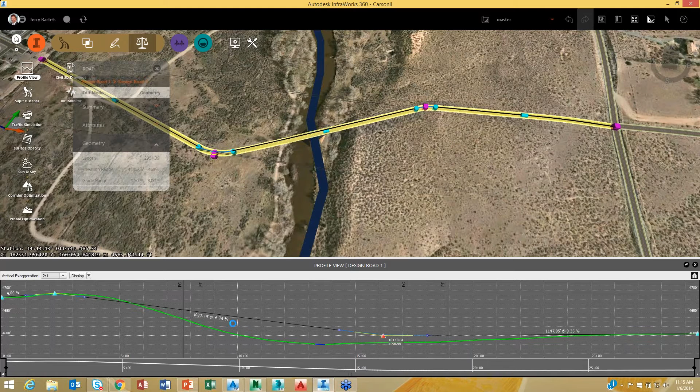And really, I think that's pretty good. I don't need to change too much more. I've got enough that I can work with for a bridge. I'm going to select my roadway, and what we'll do is we'll extend the bridge over a little bit further so that it's not quite as tight to the water. Move this back in this direction.

And maybe we'll enhance our bridge just a touch. Instead of using the default piers, I'm going to select those and go with, I like the arched myself. So I'm going to double pick to set that to the arch display, and then I can right click on that one and I can easily apply that to all the piers. So we'll get that in.

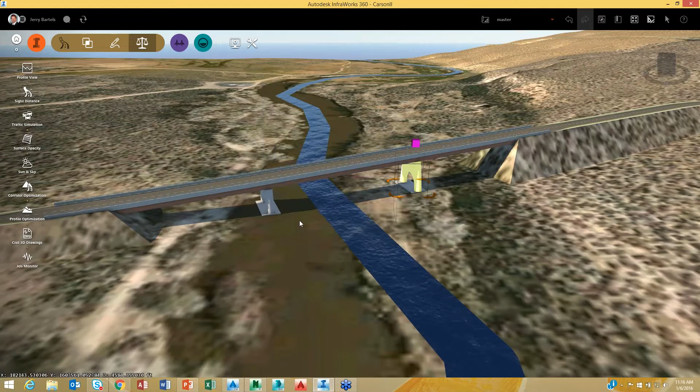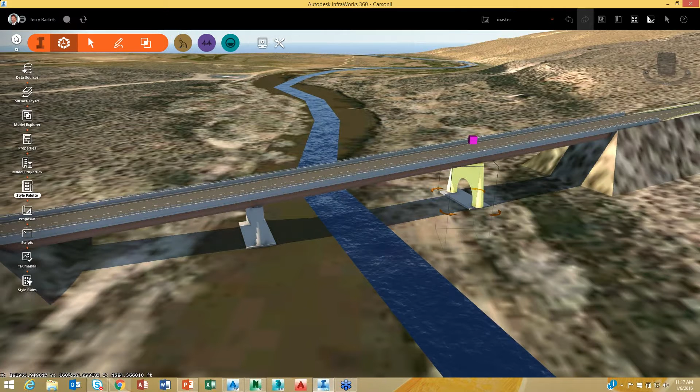And we'll do one other thing. Our bridge is nice in that if we zoom up, I've got a guardrail. I'd like to get a little bit more detail on it so that I get a little more bonus information as I attempt to use this in Civil 3D or 3ds Max. So what I'm going to do is we'll apply a more detailed style to it. We'll bring up the styles palette. We'll come down to roads, grab the bridge deck, and we'll do this one here with the median.

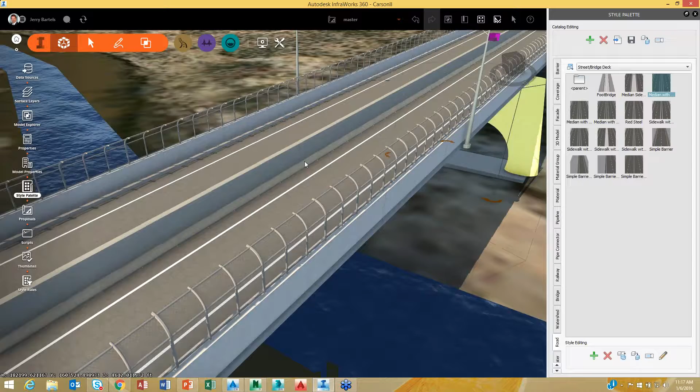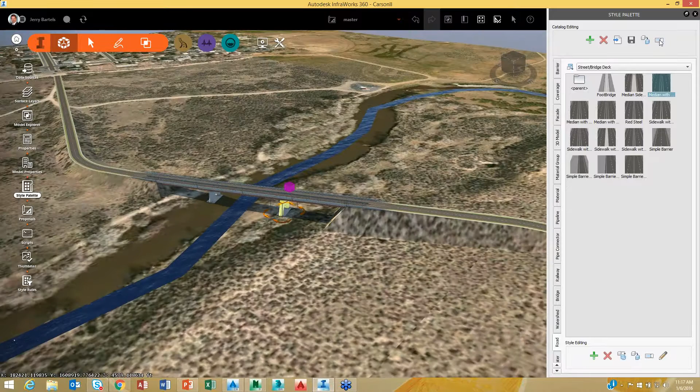Bring that onto our bridge, and what we should get is light standards. We should get the New Jersey barrier running down the middle. We've also got the fences on the outside. We get a fairly detailed bridge very quickly by creating this in InfraWorks 360. Okay, so with that created, I'm going to drop out of my styles palette here. We'll maintain this as our model for right now.

The one thing that I need to do if I had pulled this up from Model Builder is assign a coordinate system to it, because by default it's just going to be in lats and longs. So we'll hop into my model properties. You'll see that in this model I've already got a projection associated with it that's Nevada West. It's NAD 27, but it's west and feet. Because Carson City and Lake Tahoe are pretty much on the border of California and Nevada, that puts us in that zone, and that's the coordinate system that we're working with.

So with that, I'm pretty happy with my model. For me to be able to use it in Civil 3D or pull it directly, I'm going to have to close out of the model. So I'm going to close, and we'll fire up Civil 3D. I'm going to begin by going up to Insert. We'll grab InfraWorks 360, the InfraWorks 360 model, and we will select Carson 2, which is the one that we're in right now.

We'll open that. I do not have a coordinate system currently assigned within Civil 3D, so we'll set that to be consistent with what's in InfraWorks. I can establish an area that I'm interested in, so we'll select area and use my online map information to do that. I can see a dark line as the limits of my model. I'm going to use an area that's just a little bit within those limits. We'll take something like that.

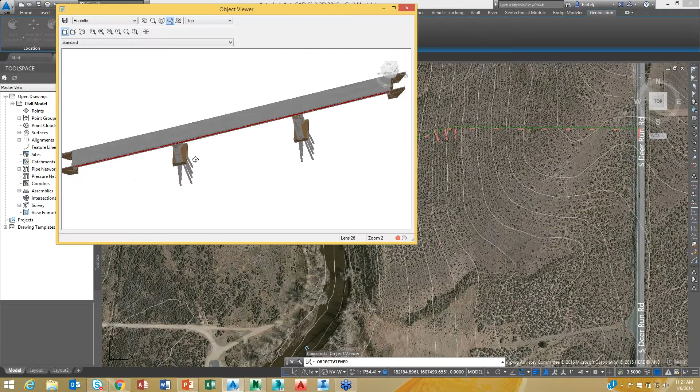This is a fantastic way that I can bring in the Civil 3D information. I've got my centerline roadway, I've got my bridge. If I look at the object viewer for the bridge, I get a fairly detailed bridge. My piers look pretty similar to what I had in the model that I created, but I've lost a lot of the extra detail that was created with respect to the fence, the New Jersey barrier, and the light standards. I'd like to at some point get access to that, so we'll start to look at how we can get to those things.

Now let's come back into InfraWorks. There's one other thing we're going to add to our model: I'd like to add a couple of buildings. So I've got the road, I've got my bridge. We'll come back to that model now and add a couple of buildings that we can work with.

So we'll go ahead and have this initialize. When this pops up, we'll probably see that our other model has come back from Model Builder at this point. Nope, not yet. Oh yeah, no, it did—it was this one right here. So we'll continue on with what we had.

And what I'm going to do is this: in this location, I'd like to add a couple of buildings. We'll enhance our model a bit.

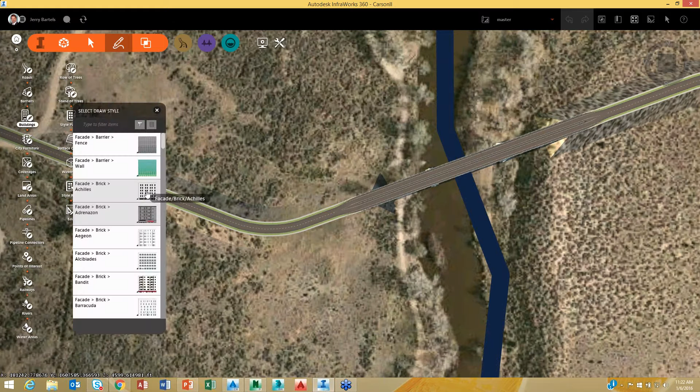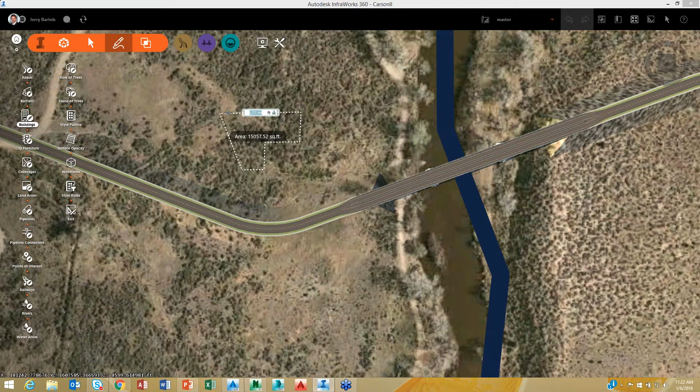I'm going to draw and create a building. I'll just grab the one facade here, and the one dimension I'd have you take note of is I'm going to type in 50 foot and enter so that it locks at a 50-foot dimension. I'll pick my point, then hold down the control key and continue to pick points from there. The reason I'm doing that first one at 50 feet is so we can go back later and verify that the size of what's exported is correct.

I'm going to go ahead and create another building on the other side over here. So we'll select that guy and drop that one.

With my buildings created, as I look at these, my level of detail for the buildings has been turned up such that you can see I've got the fire escapes on the outside, I've got some awnings outside the building. If I come over to this one, we'll see that my windows are inset, as is the doorway, and there's a lot more detail on the buildings.

Where I set that was within the tools in here. We'll come back to my application options and go into my model generation. I'm going to show you where this is, because by default it's usually set down to low or medium for performance's sake. I'll set this to high, so that I could get the detailed buildings out of this environment, much like the bridge.

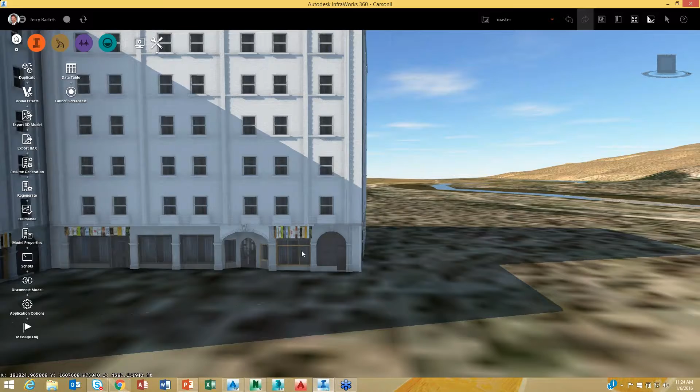If you set that after the fact, you'll want to hit F5 to get it to redisplay your model, and then once your model is redisplayed, you'll have access to that higher level of detail with the buildings.

At this point, I'm satisfied with my model. I'm going to come back to Civil 3D. If I'd like to see where those buildings exist in this environment, there wasn't the ability to export those buildings directly in that tool, or import it through the tool we looked at before.

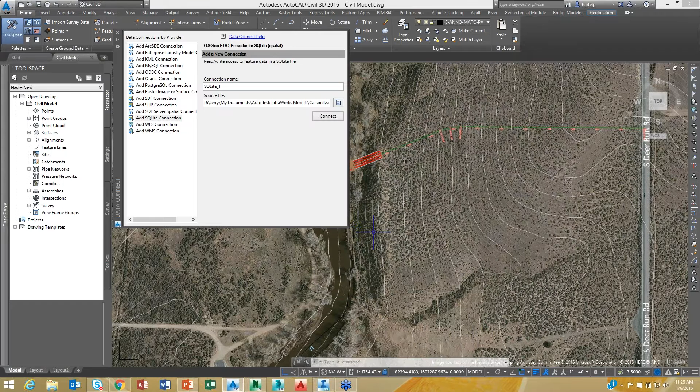So instead, what I can do is use Map to bring up the task pane. We'll go ahead and turn that on. What I'm going to do is connect to data, and I'm going to connect to the SQLite database, which is the file format we're using for the InfraWorks model. I'll navigate out to Carson 2, and we'll connect. Then I'm going to scroll down and tell it that I'd like to see the buildings.

Go ahead and add that to Map. Now when I do that, on occasion I'll see that my buildings are now in a white space, and from a coordinate standpoint, they're very different from where they should be. I've actually got coordinates down here in the negative values.

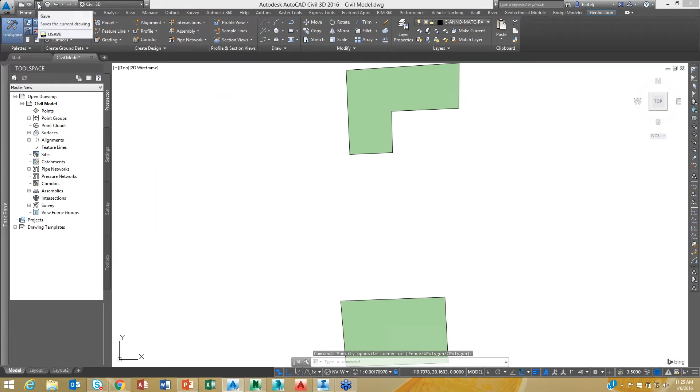What I'm going to do is this: if I save the drawing, I'm going to close it, close my civil model, and then open that back up again. The reason is that it had a coordinate system in it initially that was set by Civil 3D. Because I'm using the tools in Map, sometimes until I save, I might not have access to both those coordinate systems being the same.

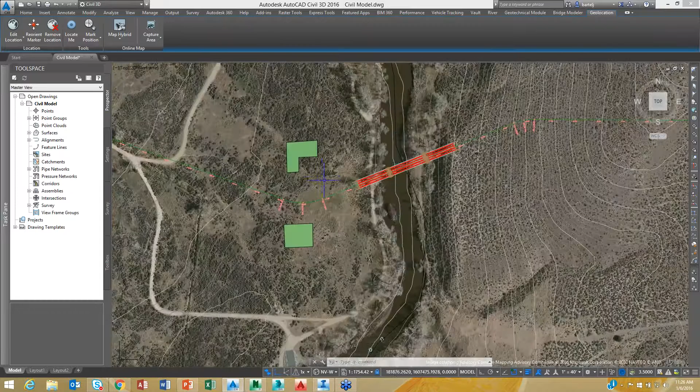So I'm going to zoom extents, and we'll see now that those buildings have been reprojected exactly into my model where they should be. All right, so just using the interaction with Map, I can start to pull data in just to see where it is.

All right, maintain that connection back to InfraWorks 360. Those buildings look good, but maybe along the way, I'd like to get some of that detail that's in InfraWorks 360. I created those beautiful three-dimensional buildings. Maybe I'd like to bring those into Civil 3D and use that as part of my model, maybe leverage that even further downstream or at some place outside of the InfraWorks environment. Well, I can do that very easily.

I'm going to come back to InfraWorks. We'll view my model here from the top. One of the things we'll look at here real quick is if I hover my mouse once again, like we looked at with the road to determine the station, if I hover over the point of the building down here, I can see roughly the coordinate of where that corner of the building is.

So that's roughly 18, 18, 29. All right, so we'll just keep that in the back of our mind. 18, 18, 29 is the location of that corner.

Let's do this. I'm going to export. If I want to bring this out, we'll export a 3D model. Using the options that are available to us with a polygon, I'm going to pick, we'll just window around the buildings in this location, double pick to finish.

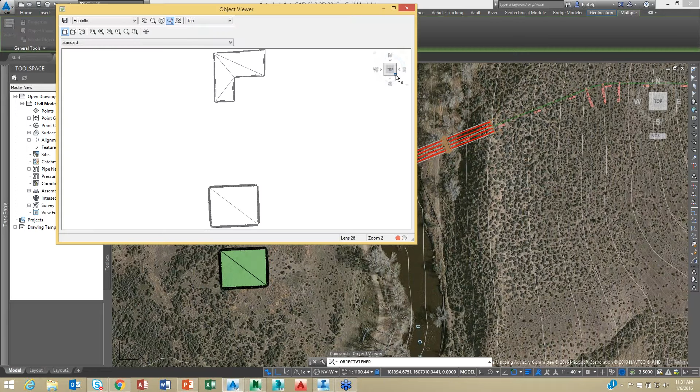At this point, what I have is the buildings have come in. I'll make a quick lasso around those, and with those selected, we'll go ahead and look at my object viewer. I can see that I do have my geometry, I have the inset windows in that, but I didn't get the materials. That may be fine, that may be all that I need.

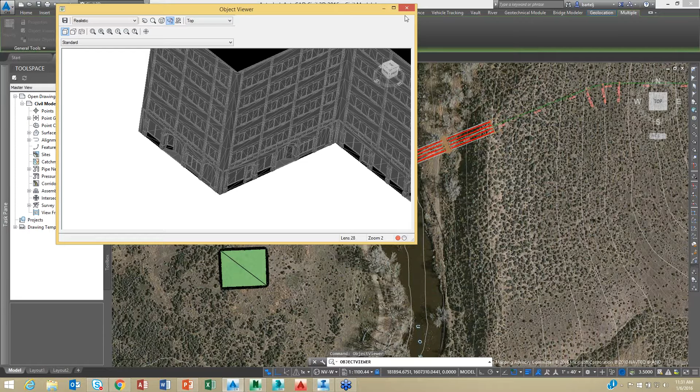If I just need the model geometry in here, that gives me a mechanism to do that. If I want to bring the buildings in and also get the materials associated with that, I have opportunities to do that too. So I'm going to close the object viewer, back up in time - this is what that undo mark was for. We come down, say undo, and then B for back, and it's going to roll back to the point before I brought those in, because we'll be bringing those in again.

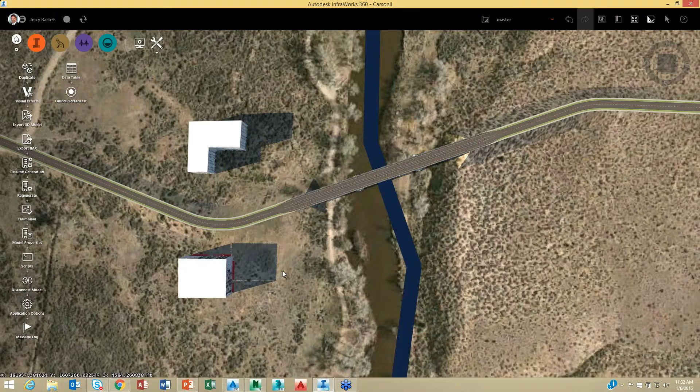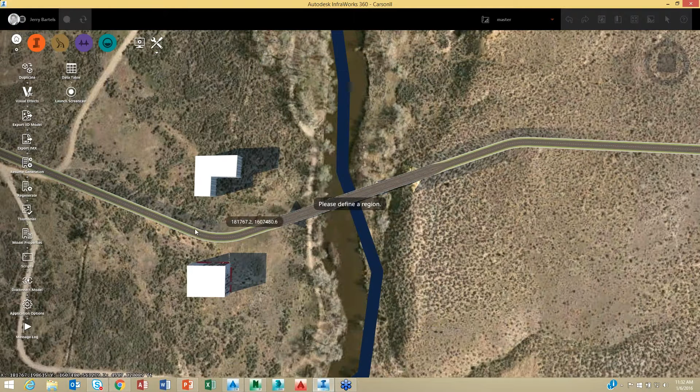We'd like to get the buildings now with the materials. If I'm going to do this, I'm also going to bring the bridge as well - I only took the buildings before, but since we're doing this a second time, bringing in that level of detail with the materials, we'll do it for the bridge too. So we're going to export the 3D model as polygon, just to keep it somewhat size-wise nimble that we can work with.

We'll pick those points - the area that we're going to work with. Once again, we're going to set it to user defined, and set these to 0. This time, because I'm exporting a number of things, we'll just do it in a single file, and put that out in my folder here, and call this site model, and we'll go ahead and export it.

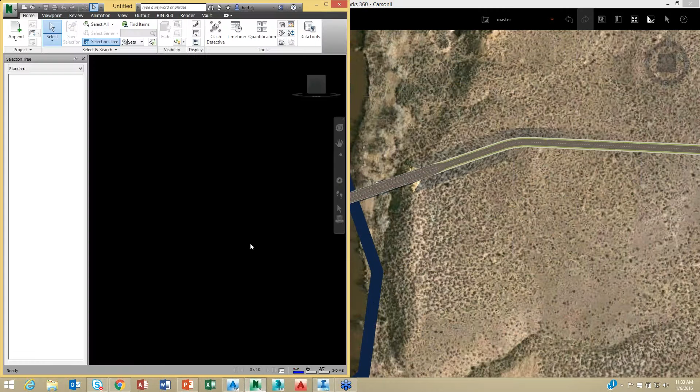Now, when it takes it out this time, we'll process it through Navisworks. Navisworks within the suite gives us our best ability to manipulate FBX files and still maintain our materials and all of the look and feel of the geometry that existed in the original authoring application. So I'm in Navisworks, all I need to do is append. We'll go up to my folder here on the desktop and grab my site model.

It's brought in, and as I view that from the side, we see here is our model. I have the 3D geometry, I've got all the materials. If I start to orbit around this, I can see that I've got my fence and all of that. That rich three-dimensional geometry that we created in the InfraWorks 360 environment, I've now been able to pull out into an environment here.

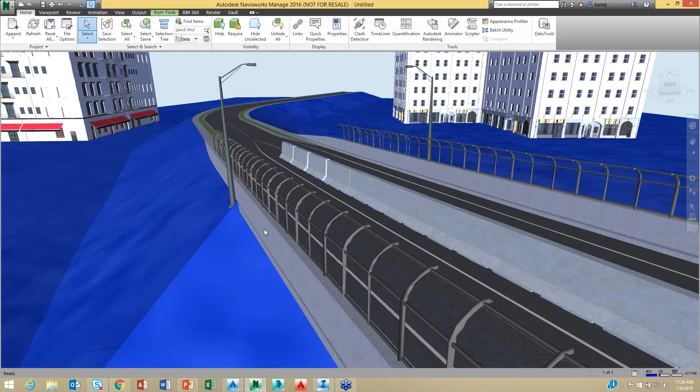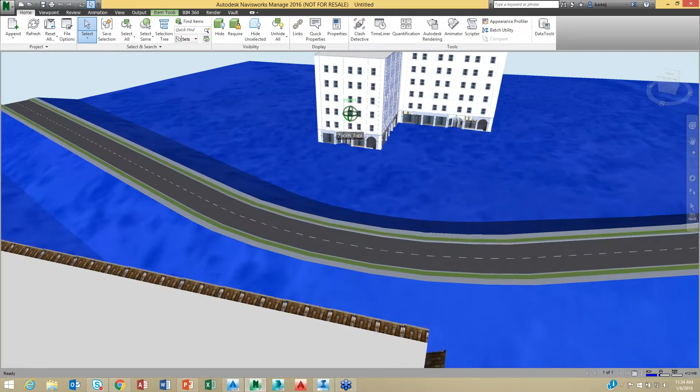We're going to use the step of going through Navisworks to basically bake in the materials such that we can bring it into Civil 3D and move it from there. But before we do that, a couple things - when we deal with Navisworks, we need to make sure the geometry comes in correctly, because this is a tool we use to bring together or consolidate a lot of different models from a lot of different authoring applications. I need to make sure it's the right size.

So I'm going to go ahead and do review, and I'm going to measure. If we come down to this point here at the base of the building, we'll pick that point and pull it off to the side, and we can see my distance is roughly 1.6 feet - that's definitely not the size of my model. It should have been around 50 foot, but that's all right. What that means is when the geometry came in, it was not scaled properly.

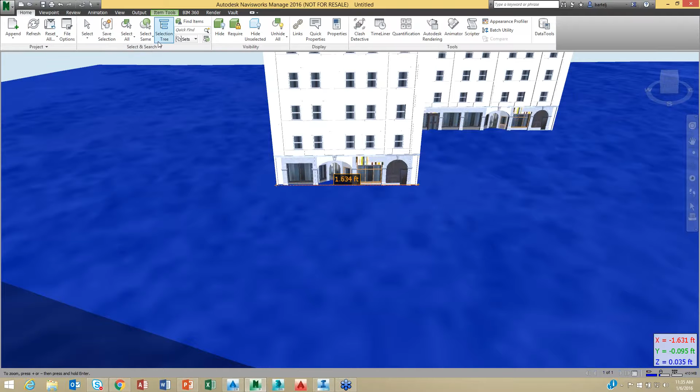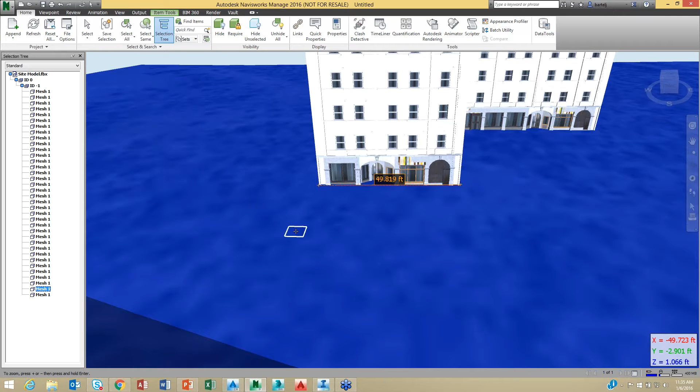So we'll go to the selection tree, which shows us our model, and a quick right click on the model itself - I can come down to units and transform. Instead of my units coming in as centimeters, I'm going to bring my units in as feet. When we say OK, we see my geometry automatically updates so that it's more consistent with the 50 foot that we would have expected.

Now, the other thing is, if there are questions about the coordinates that it currently resides at, that was like 18, 18, 29 or something like that. Can we see the coordinates here in Navisworks? And I can. If I come up to View and Windows, there is a measure tool that will show me those coordinates, that as I pick points to measure, it will show me where

I'm at. So the corner we were looking at down here was this guy. So if I pick, I didn't hit right on the corner, but I'm 18, 18, 30. I think we were 18, 18, 29 before. So I know now that my model is scaled properly and it's sitting at the correct coordinates that we would expect going into Civil 3D.

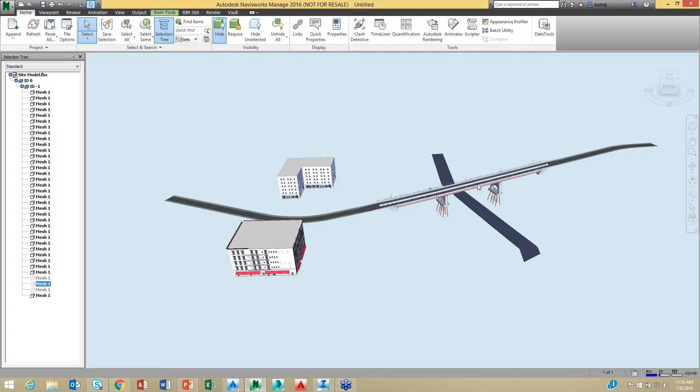The only other thing that I'm going to do is I really don't want any of the surface information. So I'm going to go ahead and select that, and I'm going to start to hide it. I've already got the surface in my file. Granted, there's some proposed in here. I would do that with my corridor model anyway, so I'm going to go ahead and pull those out. What I'm interested in specifically is the bridge and the buildings. So we'll isolate those on the screen using hide, and then we'll come down and we'll export via FBX.

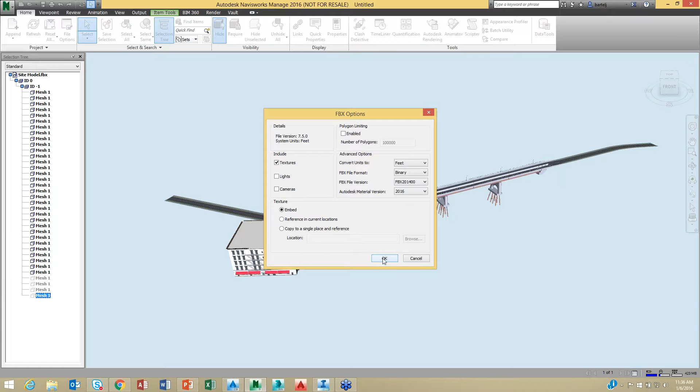Include textures, lights and cameras. I didn't create any anyway. We'll embed the textures, that's good. We'll say OK, and this is going to go in as my, we'll say project building bridge. I'll save that FBX file. We'll come back to Civil 3D.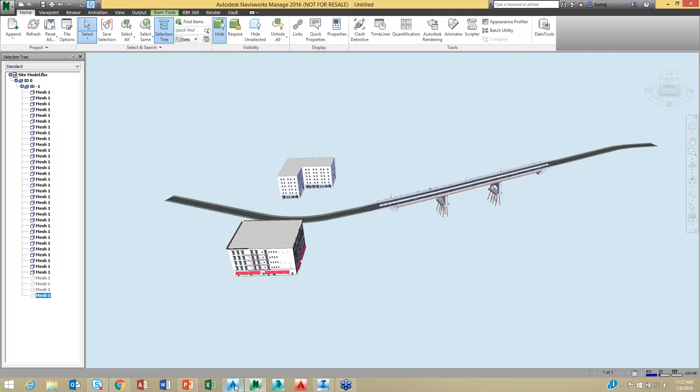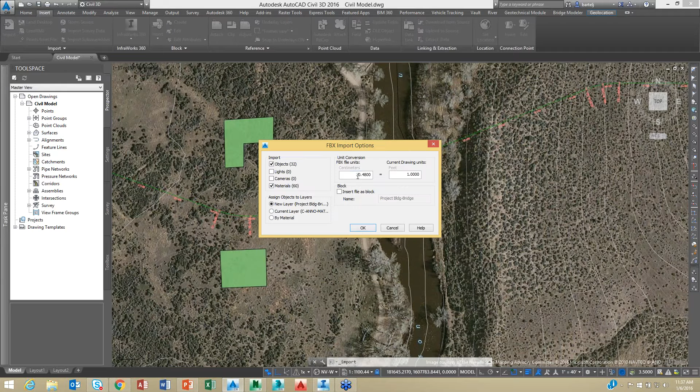Let's go ahead and take this bridge and we'll hide it. Oops. Gotta make sure that we hit the bridge and not the surface. So we'll isolate that and hide it. And then what we're going to do is we're going to import the project building and bridge. We'll say open once again, scale 1:1. We'll say OK. That information will be processed and it's displayed for us on the screen.

If I come in and look at this, and let's save this guy, and then I'm going to use the shift and my wheel to adjust my display. It's showing me the aerial image underneath. It's not being draped, so it's actually getting a little confusing to see that there. So it won't drape these images, so I'm just going to turn that off for right now.

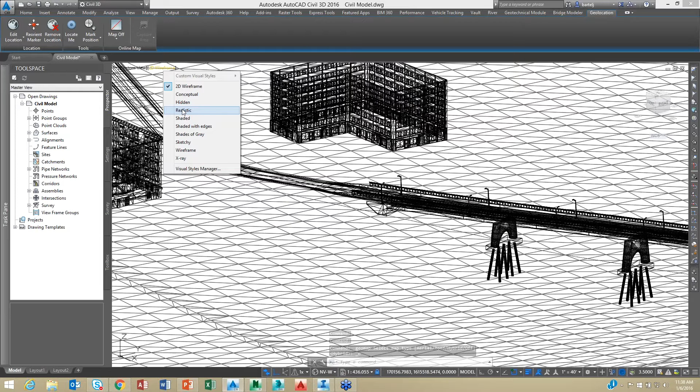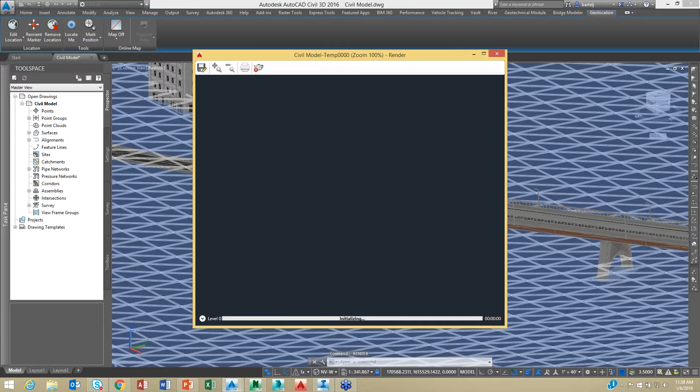And if we come in and look at this in a realistic view, I can see now that there's my red awning. I can see the colors light up for the windows. I can see the girder materials that have been applied to the bridge. And if I render this, just using a render command in a Civil 3D environment, we'll see those materials are being applied to the geometry.

So now very easily I can bring not only the buildings and the materials themselves in, fully represented in all the three-dimensional geometry that was created in InfraWorks, but I can also use that to bring in the bridge that would have been created using the bridge design module as part of InfraWorks 360.

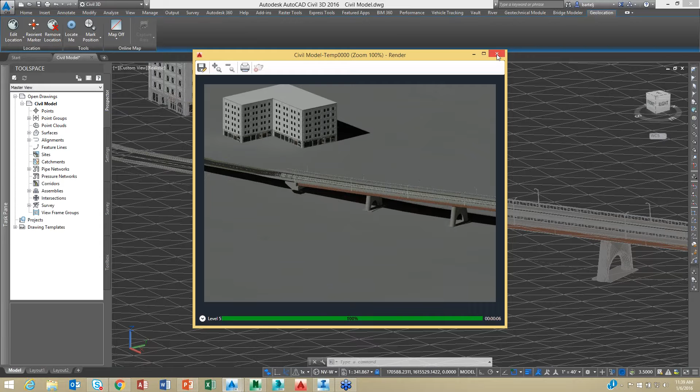Now from here, one of the next places that folks typically want to go is, I just went to a top view, we'll zoom back in on this, is it's like, hey, this looks great, but what I would like to do is I'd like to leverage that bridge now maybe in 3ds Max. There's a tool that we can export data out of Civil 3D. We can say output, we can go to export to 3ds Max, but like the tool that we export data out of InfraWorks 360 into Civil 3D, it's limited in what it can push out.

From InfraWorks 360 to Civil 3D, I'm getting the centerline road, my intersection, a smaller number of facets on my bridge, if you will. So I can get the bridge, I can get the surface, but I can't take everything, or I don't have access to everything in the model. Same thing when I go to export to 3ds Max. I can push out a corridor model and my surface, but I don't necessarily have the ability to push out these buildings or this bridge, effectively at all. I would need to do something else with that. So let's take a look at that process.

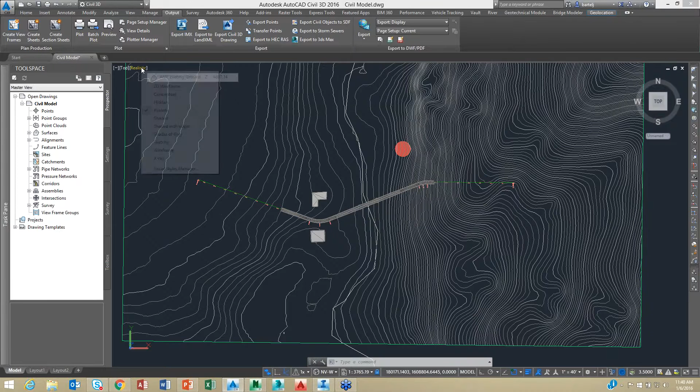The first thing that I want to do is I'm going to need an aerial photograph to drape over the top of my surface when I get into 3ds Max, so that I've got a more realistic looking terrain than just the gray that we've just seen in here. So one way that we can do that from a 3ds Max perspective is I can grab an image off of Google Earth that we can take a look at. So let me minimize these guys. Let's come up to here.

I'm going to fire up Google Earth Pro to show you how you can do this. Google Earth Pro now is, I believe, free. So much like the original viewer, and the advantage to doing this in Pro is it gives us the ability to export the image at a higher level of resolution than what we would get out of the prior version.

So let's go to Lake Tahoe. Go find that on our map. Okay, and if we pan over and we start to zoom in, I'll find that location that we were interested in before. All right, I'm going to make sure that I'm not, there we are, make sure that I'm not viewing that at a skewed angle. I'll hit N for north so that it's squared up on the screen, and I'm pretty happy with what I see there. My project is going to fall into this area, but my aerial photo should fit over the top of that fairly well.

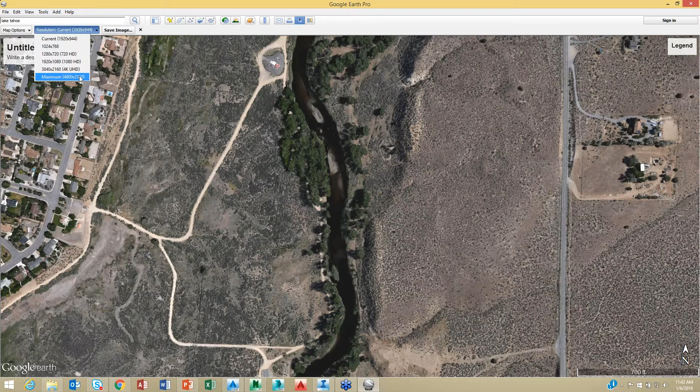So what we're going to do, we'll bring this guy up here with the image. We'll say save. I'm going to bump the resolution up, and that's the great thing about the Pro side: I can get a resolution all the way up to 4,800 pixels. My map options, I'm going to turn off some of the extra information that's going to be added to the map. If I'm going to be using this for something that's going to be displayed as part of an exhibit or whatever, I'll want to make sure that I apply the appropriate attribution with it. For right now, I'm just going to use the aerial. We'll just clean that up so I don't have to worry about that being on my image.

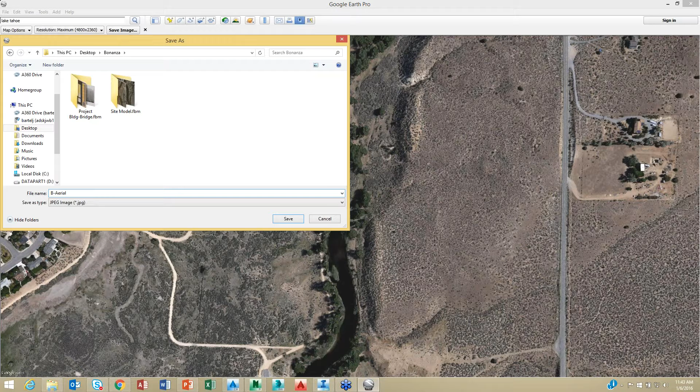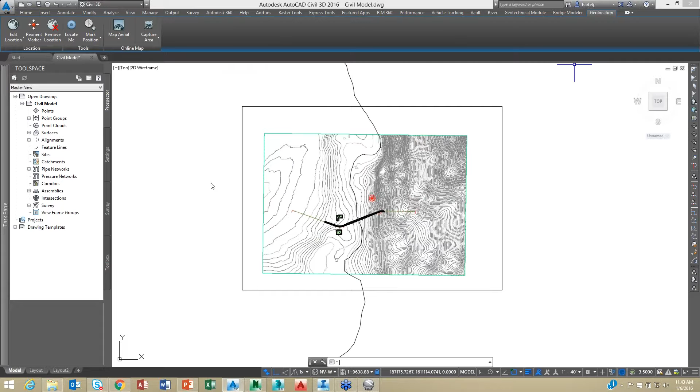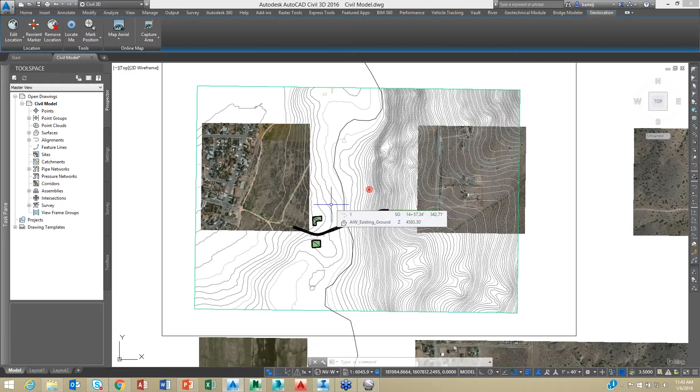We'll go ahead and save that to my desktop here, and we'll just call this aerial. Go ahead and push that out. And then what we're going to do is come back to Civil. And what I'd like to do is bring the aerial image into here. If I go to Geolocation, we'll turn the aerial back on so that I get access to the Bing information. And while I can capture an area with Bing, I can't necessarily export that to use for other purposes. So I'm giving that a second to pop up on the screen.

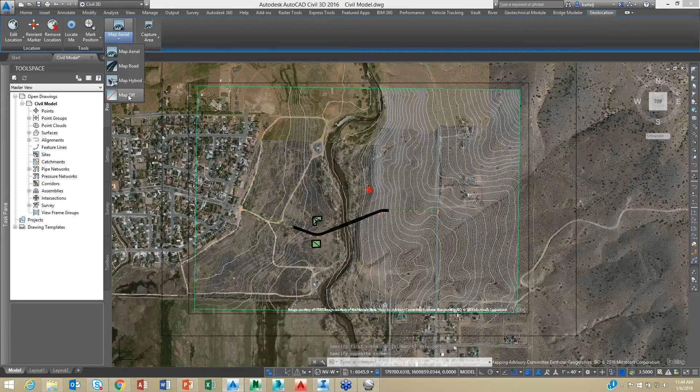There we are. We'll capture my area, and we'll just do something in the area of my surface here. We'll turn off the aerial. And then I'm going to improve the quality of this a bit by highlighting the image and setting it to very fine. Okay. Now, I could bring my image in and use Raster to rubber sheet it and get it much closer to what's here. I'm just going to use a simple align command, A-L-I-G-N, to overlay what I need to with this. To do it, I need 2 points within the map to work with.

So I'm going to come up, and this is why I improved the resolution as much as I could. I'm going to draw a circle here at the corner of the first driveway on this street. So that's 1 point that I'm going to use, and then I'm going to come down to the lower corner down here. We'll try this tree in this location. We'll drop a circle in here as well, maybe at the center of that tree. We're just doing this quick for right now. And we will attach our image.

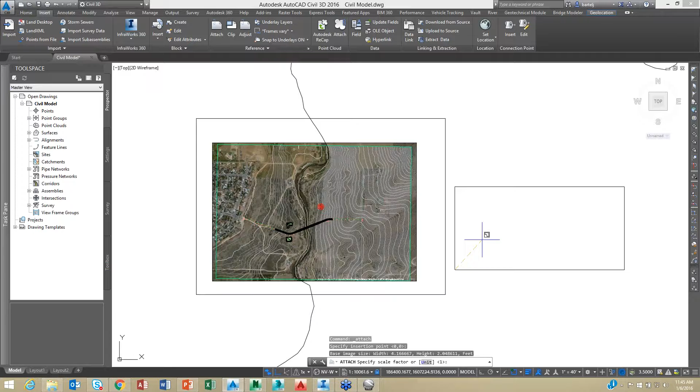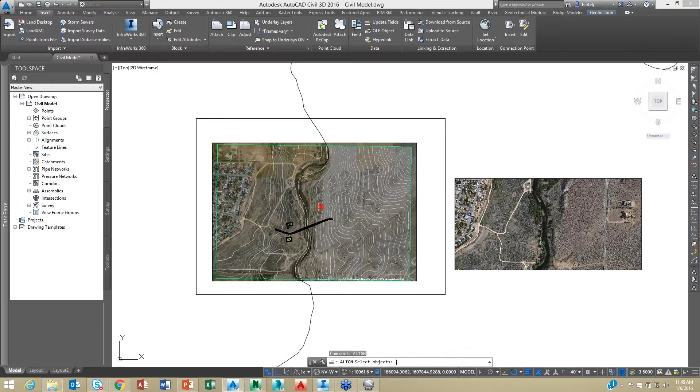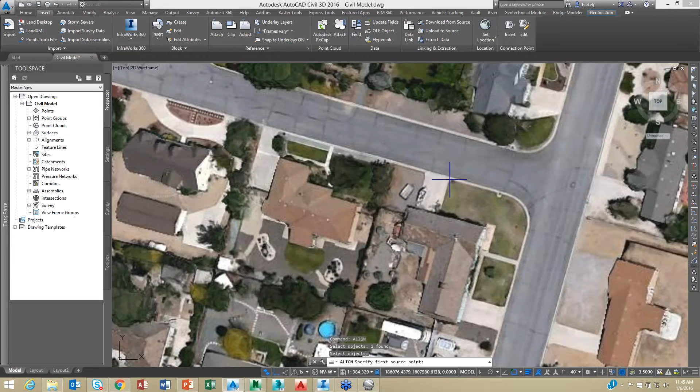All right, I'll specify my insertion point on the screen and my scale. We'll drop this on the side here, and I'll just scale that up close to the size that I'm looking for. And what I'm going to do is then use the command align, A-L-I-G-N, select my raster image. I'm going to say align it from the corresponding point here, the corner of the driveway. I'm going to match that up with the center that we used here.

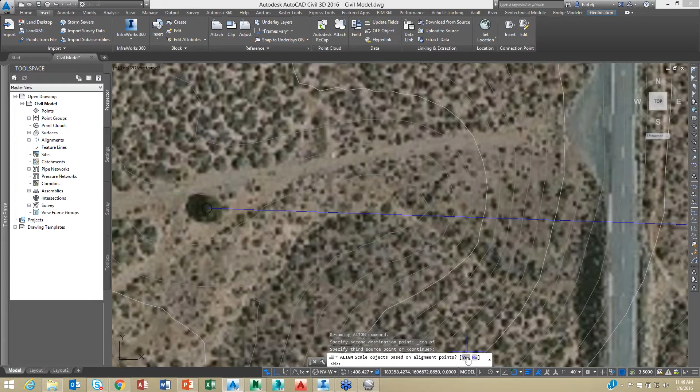I'm going to back that up, and we'll say the other point we're going to match. And good, we got that tree. So we'll pick the approximate location of the center of that tree. We'll come down into this location here. We'll say to the center of this guy. I'm going to right-click to continue, and I'm going to scale and align based on those points.

All right, so it's brought my image in. I can see that over the other one. Let's go ahead and remove the one from Bing now. I've got the new one that I've created. And the trick to using this image and a surface out of Civil 3D with what we export to 3ds Max is I want to make sure that my image and my surface are the same size.

Now in production, what I would do is I've already got my existing surface. What I would do is probably create a new one, paste the existing surface into it, and then I can take and crop and maybe simplify that surface because it's going into 3ds Max. Maybe I don't need that much detail. That is how I would clean it up. For right now, just for time's sake, we will just do it right directly within here.

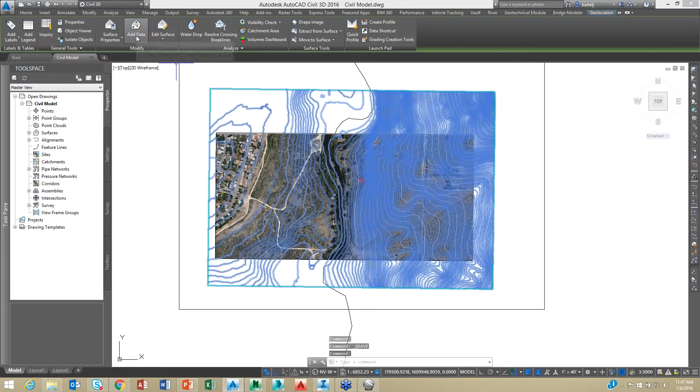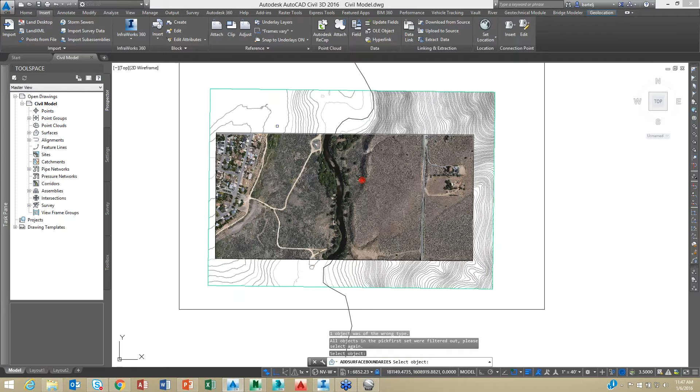Let's see. I'm going to save this. Let's see if I can use that raster image as a boundary. So we're going to say add data boundary. We'll do limits as an outer boundary. Let's see if we can grab that guy. Nope, filtered it out. Okay, so we're going to have to go around the outside of it. So we'll draw a polyline from around the outside of my raster image.

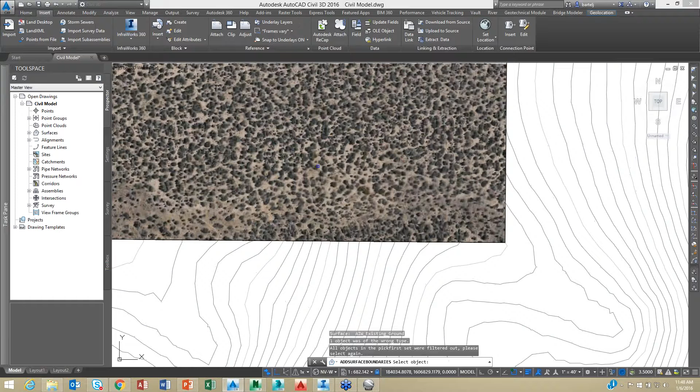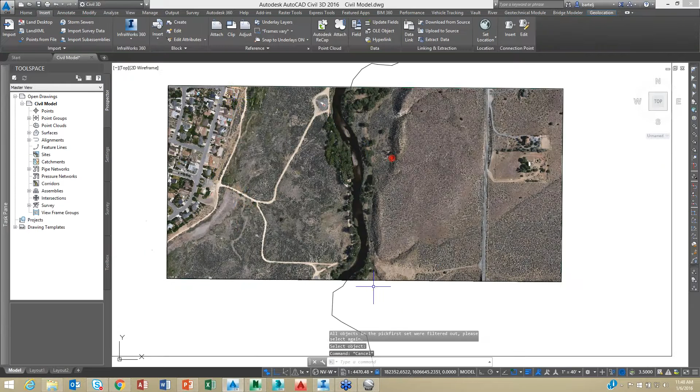There's that corner, down here, and then close. And then what we're going to do is select our surface, add a boundary, limits, select my polyline this time, and my surface is now cropped to that size. All right, perfect. We'll maybe grab that and send it to back just so it's a little easier to see.

All right, let's do this. We're going to say output. I'm going to export to 3ds Max. If I export, like I said before, I've got the ability to export some things. Right now, the only thing that's in my model that's supported is the surface. If I'd like to export the centerline alignment, because maybe I'd like to attach cars or something to that, I would need to build a corridor model, because that centerline alignment would actually be exporting the crown of the road, or the feature line that is represented by that corridor.

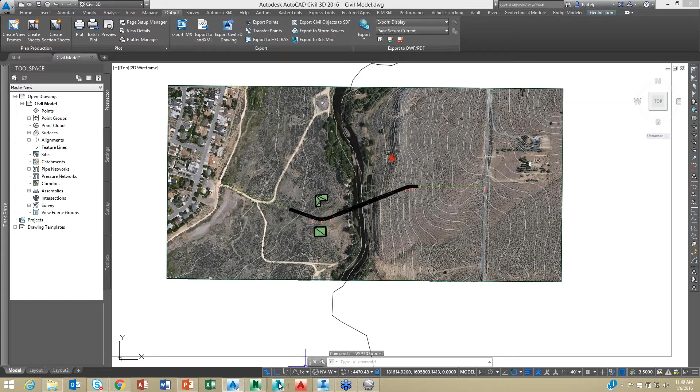For right now, I'm just going to do the surface. We won't have time to get into cars and things like that. We'll just deal with the surface geometry for right now. So we'll export that out to my folder here. Let's call it civil model, is fine. It's been exported. We'll fire up 3ds Max. Give that a moment to come up on the screen.

Autodesk made a software acquisition a number of years ago that gave us these Civil View tools. What that does is it creates tools within 3ds Max that are geared more towards somebody that's got a civil background. It helps us manipulate or work with corridor models and alignments and surfaces in a way that is more intuitive, I guess, than trying to do it directly through 3ds Max. So when it's in here, we'll find it under Civil View.

We'll start Civil View. And then I'm going to open up the Explorer, and I'm going to double click on that, which is going to dock it on the side, and it's going to give me an environment that's kind of similar or consistent with what we would see in Civil 3D. The next thing we're going to do is import that file that we exported. So we'll come back to Bonanza here, grab our civil model, and the only geometry that exists in that we'll select is our surface. We'll say OK.

Now here's the key. When I bring that geometry into 3ds Max, it's going to want to take and shift it. It's shifting it away from much larger coordinates so that it's closer to the origin. That helps significantly when it comes to materials and a number of other things in Max. In the Max environment, we're doing rendering and animation, and it just works better with smaller coordinates, so it automatically applies this shift. And that's the key that we'll take a look at here in just a moment.

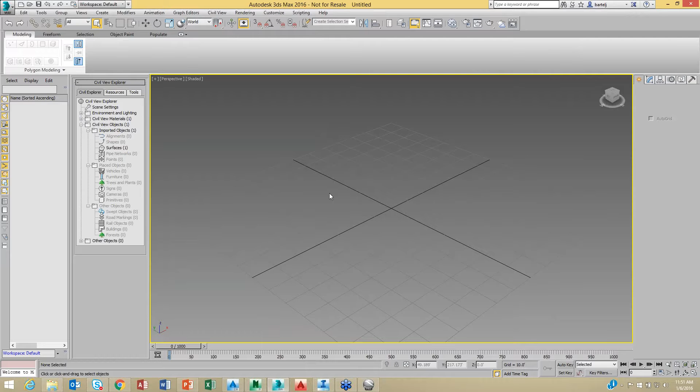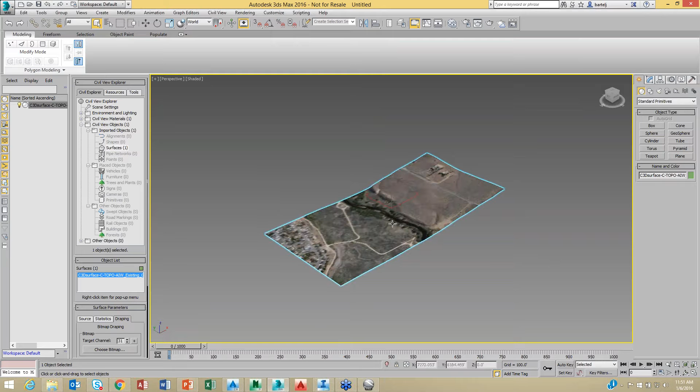So our surface is in. I can select this surface now, and using my Explorer, we'll come down to draping. I'm going to choose the bitmap off my desktop here from our folder. We'll grab my Bonanza aerial. We'll say yes, and it automatically displays that over my surface. So that looks good. I'm going to change this to a top view. Maybe back up.

Find my project here. Now that I'm looking at it in the top view, I'm going to add a daylight to it. We'll do one rendering here, and it'll look better if we have the sun in the sky. So we'll create a daylight system.

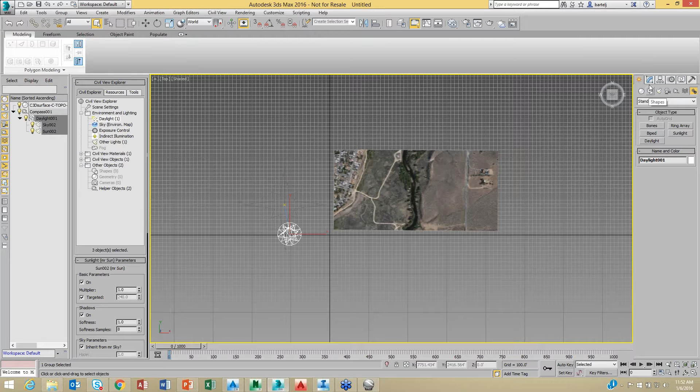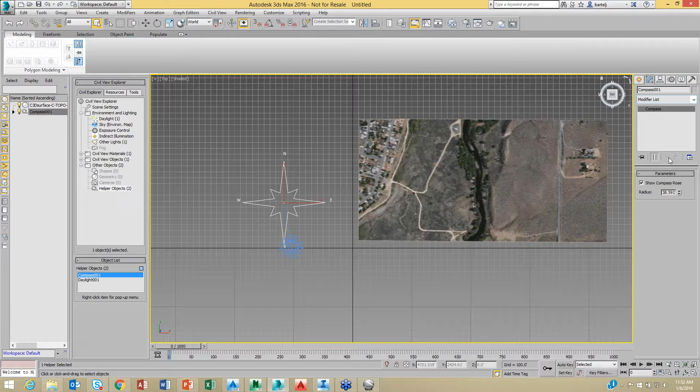I'm going to pick a point, draw my north arrow, pull off to the side for my location of the sun. And then if I come over to the side here with my sun selected, I would like to be able to select that guy. There we go. So with him selected, we're going to grab... there we go. So with that guy selected, I can come in and I can set my location.

So in this case, it's in Carson City, so we'll pick a point there. It's closest to Reno. We can tell it the time and date, whether or not we're using daylight savings time, and you see as we make adjustments, it adjusts the orientation of the sun so that we get an accurate rendering based on that time of day. So that's working for us.

I'm happy with that. What I need to do now is I need to bring my bridge in, as well as my section of roadway and my buildings. So what I'm going to do is I'm going to snap this to the side. We're going to go to scene settings so that I can see those values here. I'm then going to go to Navisworks, and I'm going to bring this over to the side.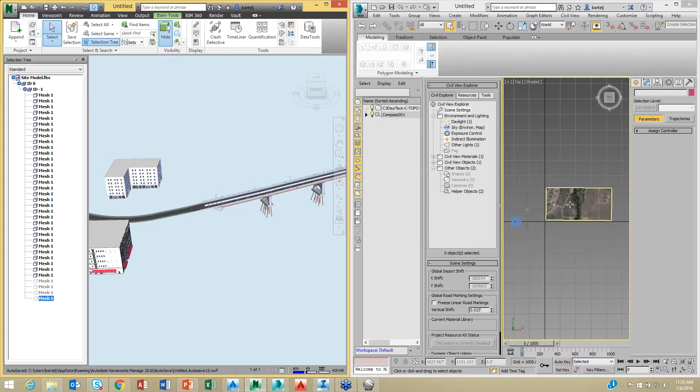All right, the one piece that we have is this is currently sitting in space where it needs to be. I need to apply this shift so that it falls into 3ds Max where it's supposed to go. I'm going to use the same tool that I did before. When I select this and we do units and transform, instead of now just the feet, I'm going to give it the origin where it's going to go. And I wish I could copy and paste that, but I can't, so we'll just type it in.

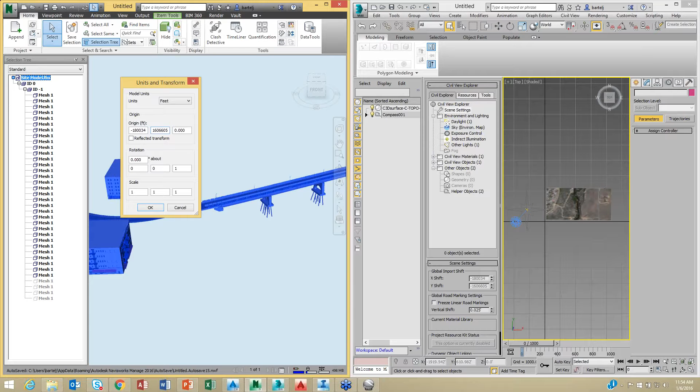We'll say negative 180034, and the Y value we're going to use is 1606,605. 605, okay. We'll say okay, it shifts, so it's in a different location. We'll adjust our display and we can see it again.

I'm going to go ahead and export this to the same folder, and we'll call it model. I'm just going to say shift, and then I'm going to say max. We'll say save. All right.

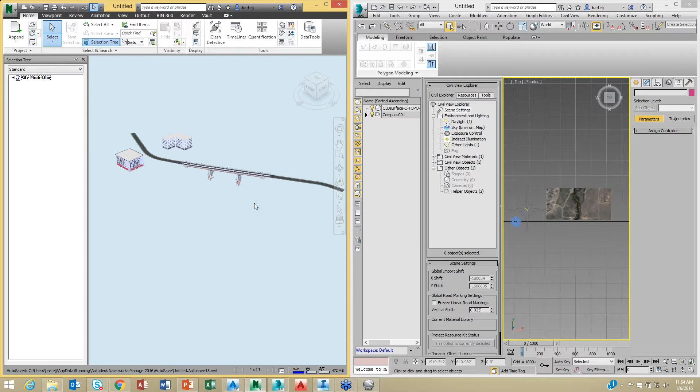Now, Dave is very familiar with 3ds Max, so he could probably take this FBX file and go with it directly. I'm not a Max person, so I need a little bit of help linking to this file and getting it to come in where it's supposed to and work the way that Max likes. So the great thing is there are other tools within the suite that will help facilitate that for me.

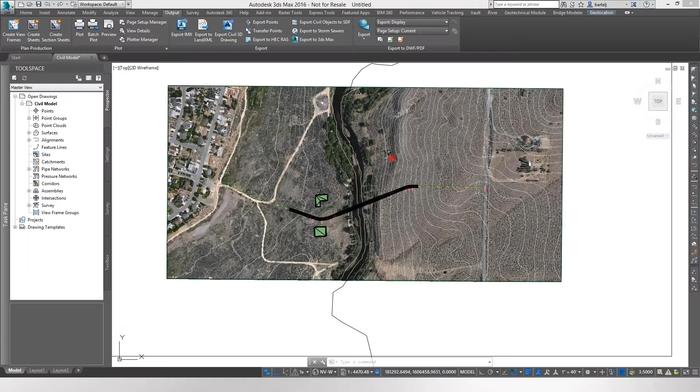So what I'm going to do is we'll minimize 3ds Max. I'm going to leave that here, and then I'm going to fire up AutoCAD. Because within AutoCAD there are tools that support the suite and the ability to move geometry or information from one tool to another. So I'm going to create a new drawing in here just off a blank template.

By default, units in AutoCAD are inches. What we're working with is feet. So I'm going to type in units. We'll set this to feet. We'll say OK. And then we're going to import that FBX file we made. So we'll come out to our folder. We'll say model shift. Same thing as before. We'll set it to 1 and 1.

Brings it in. I'll view it in my perspective view, and then if we come in and set this to realistic, all right, I get a very nice representation of my model. All right, now I'm seeing it here as everything within the file.

If we don't save it, it doesn't actually exist. So we'll save it so that it retains that information. We'll put that into my project folder here, and we'll just call this model geometry for Max.

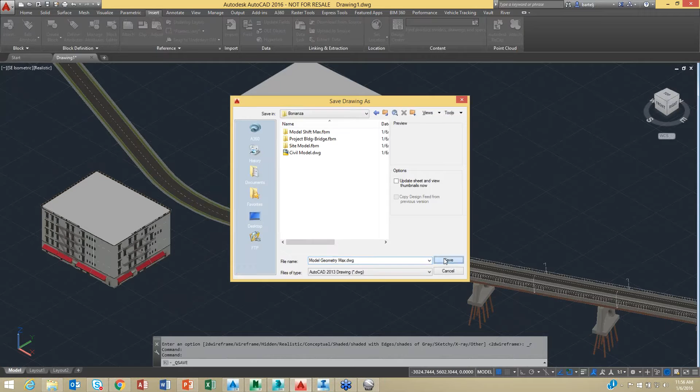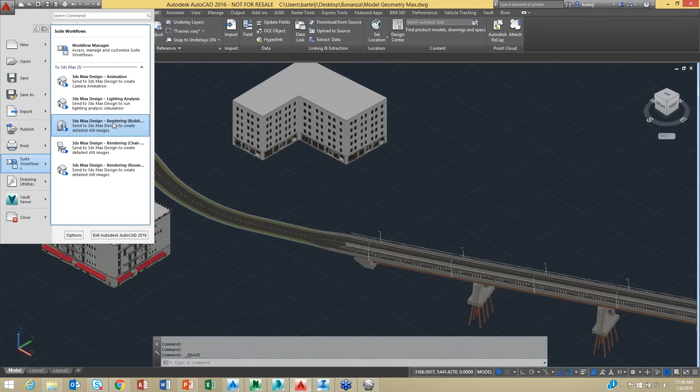All right, so I have this, and I'm going to come up to AutoCAD. I'm going to come down, and you'll see that there are suite workflows options that are available to me, 5 specific for the 3ds Max environment. So I'm going to come down to 3ds Max for just rendering a building. This will work fine for what I need. We'll select that. I can send that to Max for final rendering. We'll go ahead and run.

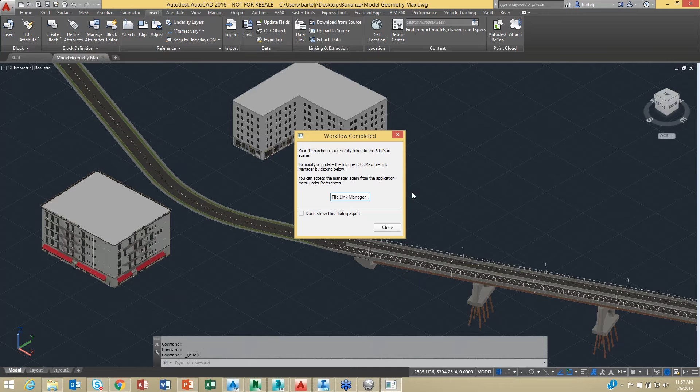Where do I want it to go? I'm going to go to the active 3ds Max session, which is currently set to untitled. That's fine. We'll say continue. It works whatever magic is required. Max links to this file and it does what it needs to do. It tells me that there's a file link manager within Max that we can make adjustments to if we need to. For right now, I'm not worried about that. I'm going to go ahead and close.

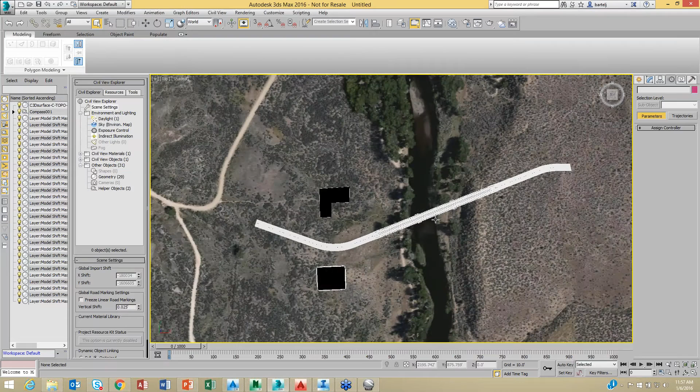And when I come into the Max environment, we see that all of my geometry has now landed within my file. So if I come into this guy now and we start to adjust our display, let's go to the perspective here. And I'm going to adjust my display.

Hey, Jerry? Yes, sir. If you just select an object and then press Z, it'll zoom to that selected object and orbit around it as well, just so you know. Okay. Yep. Thank you. I appreciate that.

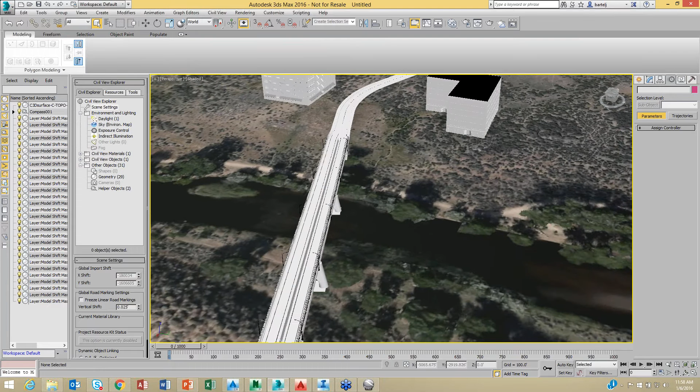All right. For right now, let's just go ahead and run. Get a little bit closer. I'm going to run just a quick render on that guy. So we'll say render production. We'll give that a second. It'll take and render. We should see some of our building in the distance, and then our geometry for the roadway. All right, or the bridge that was put in.

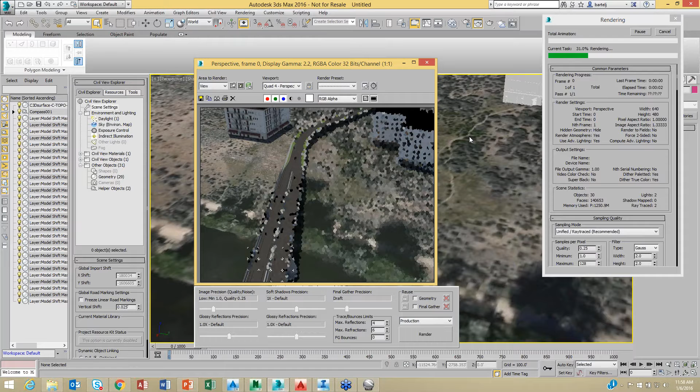Okay. Now there are some settings I'm sure that I could put in that would maybe degrade the settings so that my render would be faster. This will probably take about 30 seconds or so for the frame to complete. But the thing that was important to me, like I said, if we start from the InfraWorks 360 environment, we've got a phenomenal tool with which we can create very detailed, data-rich, three-dimensional models. And effectively, we don't want to leave those just tied up in the InfraWorks 360 world. We have the ability to move and begin to use those in other applications as well.

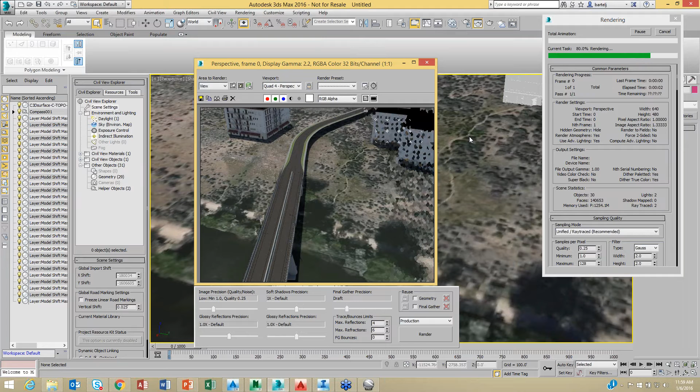All right, so we saw as we went through, we were able to take that geometry directly into Civil 3D with or without materials. We're able to access it with Map if we want to see the outlines of buildings, maybe just to get a perspective of where exactly we are. We moved it through Navisworks to bring it into 3ds Max and then be able to accommodate for the shift to be able to use that as well.

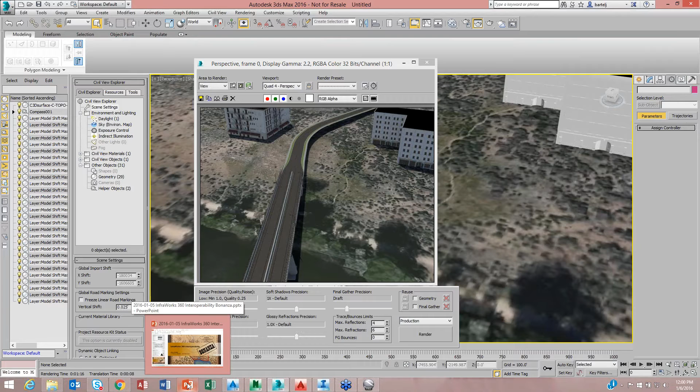And then even leverage some of the AutoCAD tools to use some of the suite workflows to automate that process. And then finally, I didn't touch it, was the Raster Design piece, but we could have used that for the aerial imagery to assist us in creating an aerial that we could take and drape over our surface. All right, so all in all, a bonanza of information, if you will, from an InfraWorks 360 point and moving this data around. So let me hop back to my slides here.